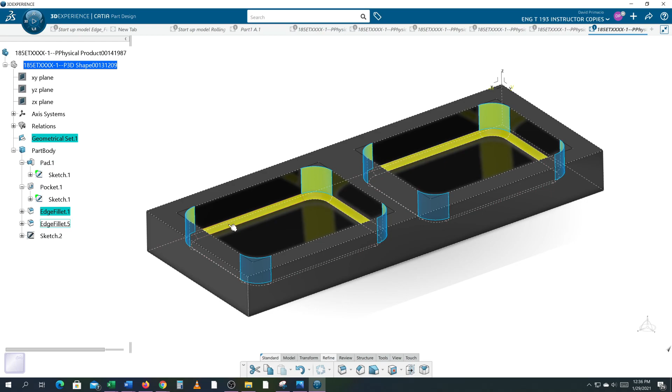Let's say I want to move this out of the pocket. So I'm going to go to my preferences and turn this off so it doesn't bump into the 2D or make it flat. And then I'm going to try and take this pocket.

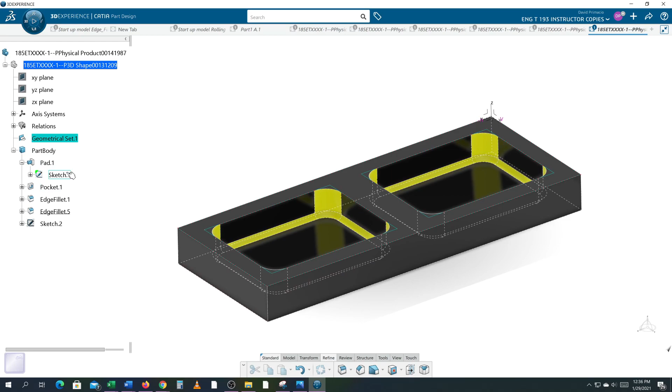Now I want to move this pocket over here. So I'm going to try this technique - go to Sketch, and I'm going to move this 2 inches, which should take that past, but it doesn't because I've got this constraint here telling it to always be a half inch, which is cool.

That's a good design. It's a good way to do that if I want to make sure I don't screw myself up. But I'm going to undo this - I was actually trying to get this profile.

Oh, you know what? Well I'll go ahead and do this. I'm going to delete this out and then take this and go 2 inches out. See how it goes past the part?

We'll do the constraint - it's fully constrained. We'll exit out, and it's not going to like this. It did not like that move - it's trying to go down past that part. So on V5, this wouldn't work either because of the way these fillets are.

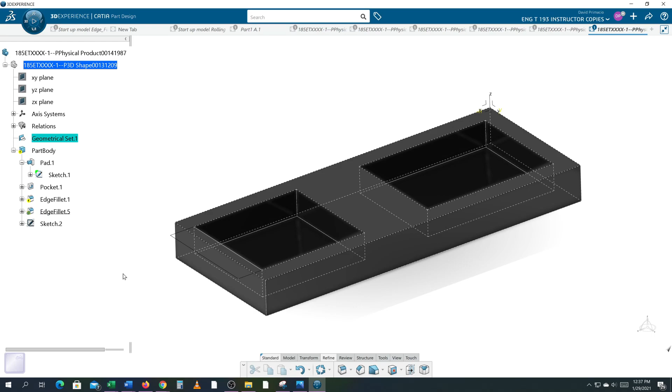And I told you this was a poor technique anyway. So let's undo what I've done, put it back, and we're going to just delete these fillets out.

Now, I know I've said to make all the same size fillets on the same branch, but you also got to look at this thing logically. I want to tie in all my fillets on this pocket to all be in one group, and same thing on the other. So the reality here is I actually would be better off if these were 2 separate pockets.

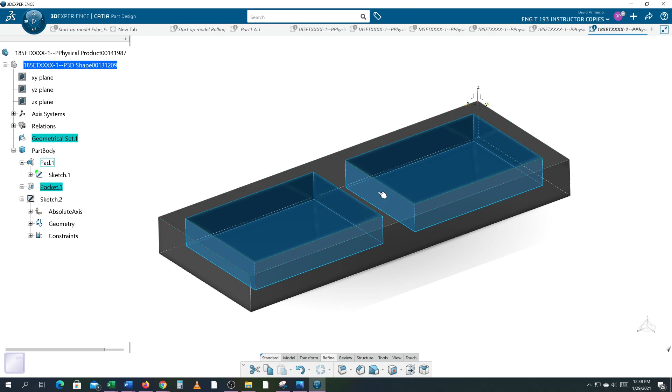Now let's take a look at this. I'm going to double click this pocket, and I'm going to hit go to profile. Because of the way I did this, I could easily delete that out. Say OK. Now that pocket doesn't exist anymore, right?

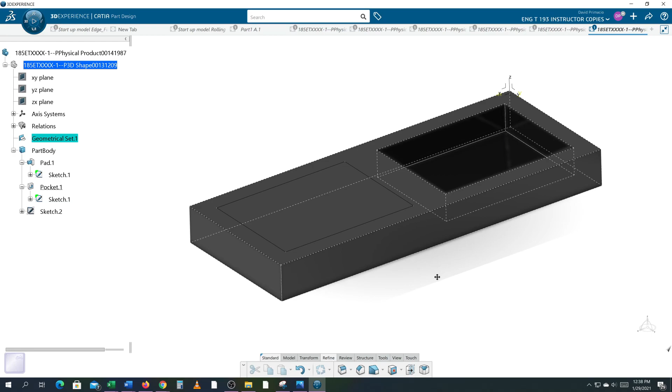So I have to have 2 separate pockets. I can do that now by going back to the pocket command, but I wanted to show you one little issue I find with pocketing.

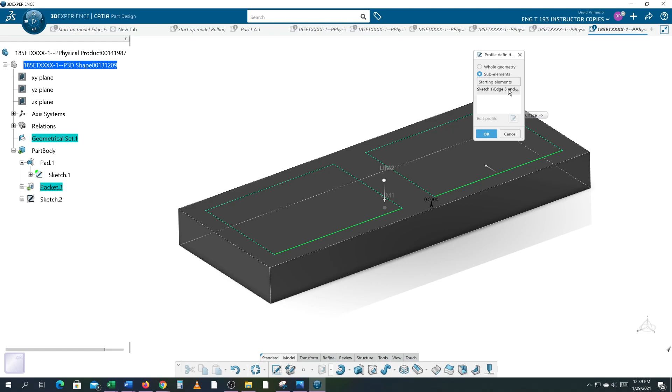Earlier, I think I showed you, if you go to Pocket, go to Profile Definition, you could grab this one and this one - you have your 2 sub-elements, but they're all in one thing. So when I select OK and I do my pocket a quarter inch off the bottom, that's all great.

But now I'm struggling to remove one of the pockets. So if I go back to Pocket here and I go to Profile Definition, all I can do is remove all of them, and then it won't even let me add this one back in here. I'll try and grab that edge back there, and it says right here sketch edge.

That's my sketch edge right there. If I click on it, it should grab it. It won't let me do it. I don't even know how to get past this.

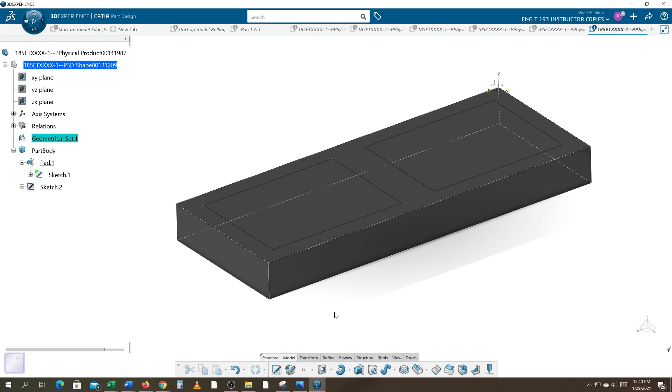So as far as I can tell, I'm stuck and I'm not able to remove this pocket out. So I'm just going to select OK, and the only thing I noticed is to delete that pocket, which would suck if there was anything tied to it right now, but all that would have to be redone.

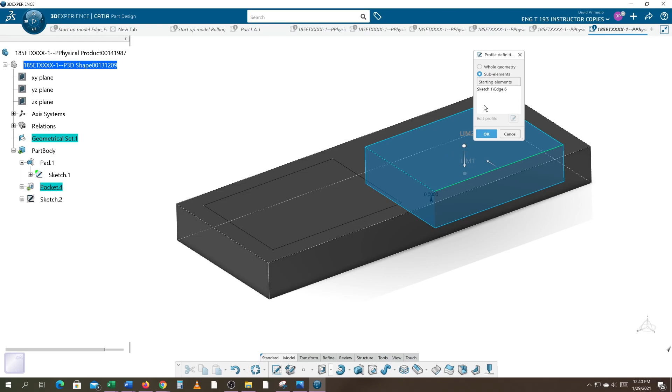So I'm going to go to Pocket, go to Profile Definition, select this one, select OK. If I go to profile definition again, I can select this one, and it will add a second one in there.

And that will allow me to have them individual, so if I want to do different things to them, I can. So we're going to go negative quarter inch off the bottom.

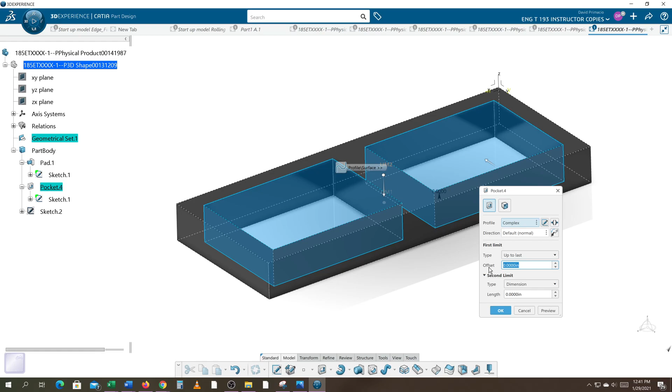Okay, now, let's see - I'm trying to remember what I was going to do here. I want to break this to 2 pockets. So I realized, oh man, I've got this in one.

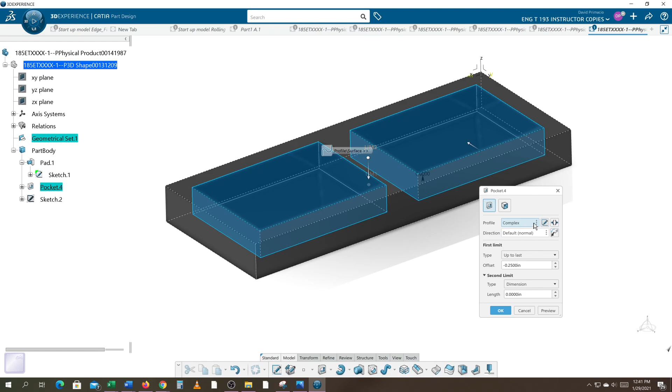It doesn't like it. So I'm going to go back to pocket, break it out, and hit that little X to remove it. So that pocket isn't there anymore.

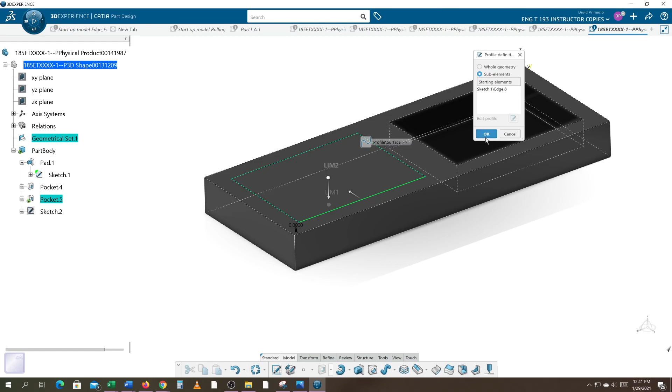So I'll go to the pocket command, go to profile and add another pocket, so I'll have 2 pockets in the tree. I'll go minus 0.25 again, so you can see in the tree, I'm still using just the one sketch and the 2 pockets. Now the problem is I'm going to go back to my sketch 1.

I don't want to do that right now. No.

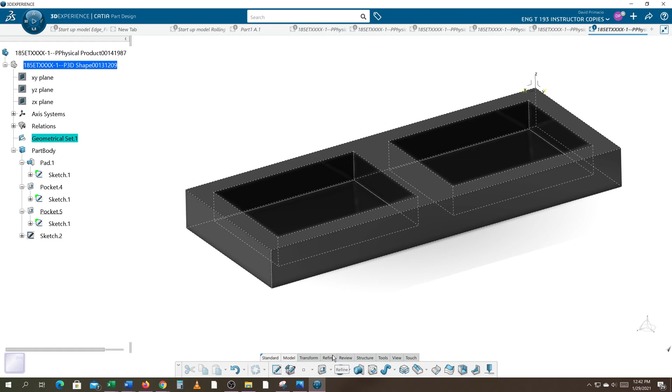The better technique for filleting this would be to go into refine, go to fillet, grab this edge, and make that a 1/2 inch radius for my end mill. And that one, and that one, and that one. Select OK.

Now, where is that fillet? That fillet is after pocket 5, but it should be after pocket 4. These fillets look like they're in pocket 5, but in reality, these fillets should be under pocket 4. So I can grab the pocket, drag it down, and let go.

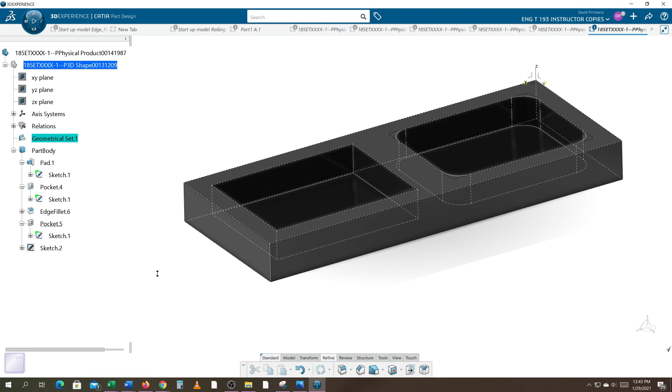Now, if I go to create another pocket or fillet, the ones on the bottom, it's going to try and put it under pocket 5. What you want to do is make your last fillet your in-work object. Now it pretends like pocket 5 doesn't even exist yet.

I go to fillet and grab the bottom surface and select OK. Whoops, I didn't want to do that size. No big deal, I'll just double click it and change that to 1/8 of an inch.

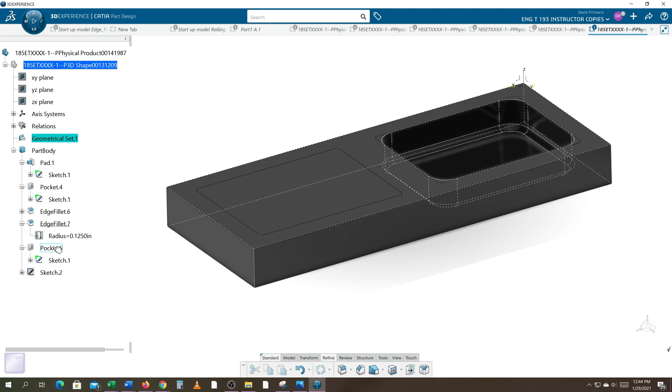So I'm going to go back to this pocket, make it the in-work object, and the pocket will appear. At which point I can go back to fillet.

I always do my largest radiuses first. So I'm going to do a 1/2 inch fillet and grab this edge, this edge, this edge, and this edge. Notice that I use the hidden line so I don't have to spin it around trying to grab the insides. Select OK. Grab the bottom surface and fillet that, add 1/8 of an inch.

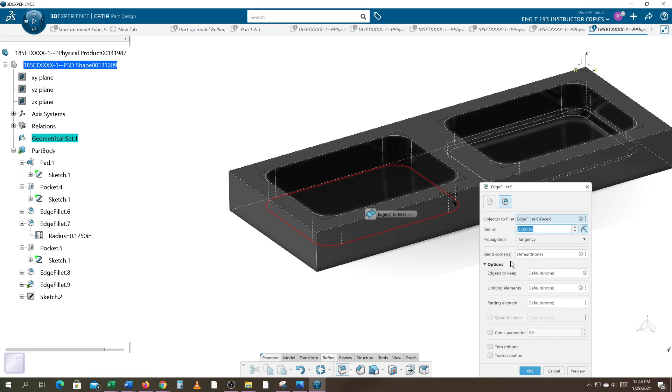All right, now this is a much better technique. You've got your... first off, let's color these. This is a group.

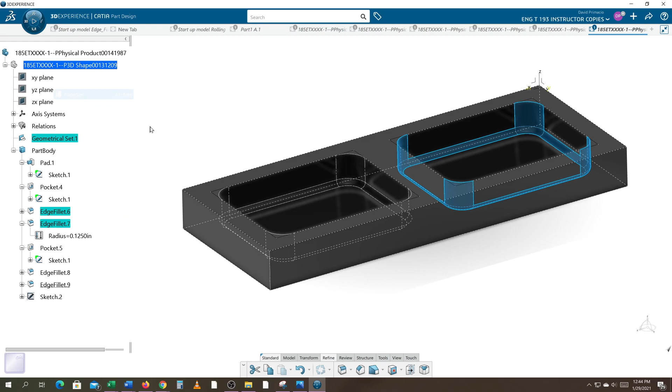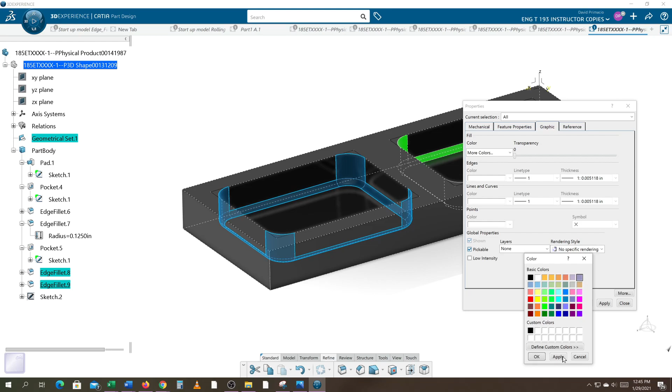And these two are a group. Oh, wait a minute. Where's silver at? There we go. I see gray on here. Oops. Okay, so we'll say that's gray. We'll make it my Seahawk color here.

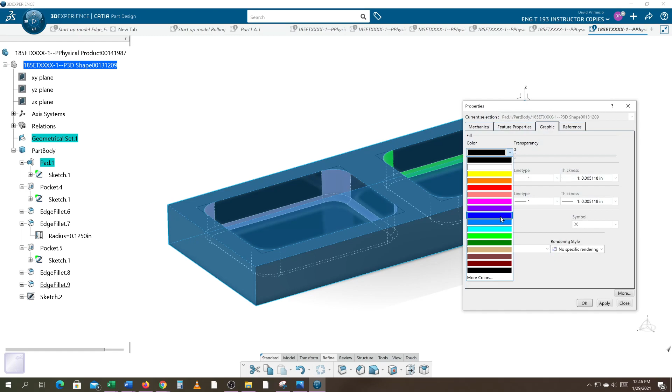All right. So this is a lot better technique because you can see in the tree. I will do a review and go to the first one. We started with the pad. We did the pocket. We filleted the pocket. And then we do the radius on that.

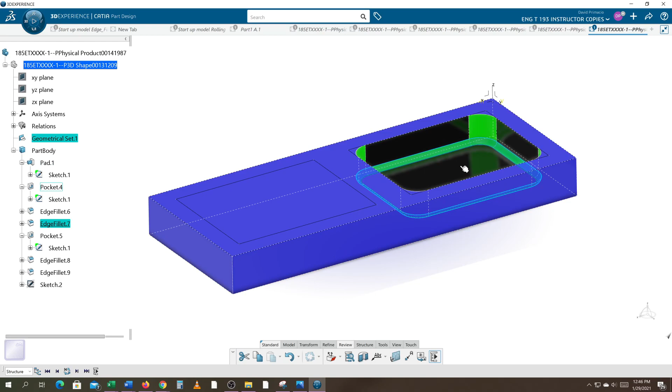By the way, if you machine this, this would happen. It wouldn't have a pocket and then add fillets anyway. So all this pocketing would happen in one time, and then the next set of pocketing would happen. And it allows me to move this as a group, where if I have them all underneath this, sometimes the system doesn't like that, and it gets confused when I try and move the pocket.

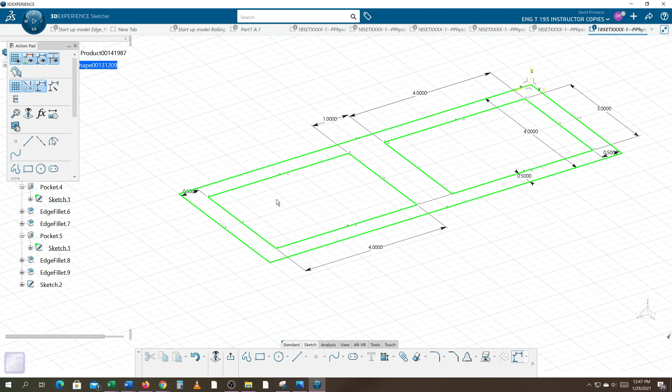I'm going to try and really confuse it and move it beyond the part. So I guess first I'll go into sketch 1, and I will make this grow 5 inches, and I'll move this 1.5 inches and exit out. See, it has no problem with that because I'm still within my boundary.

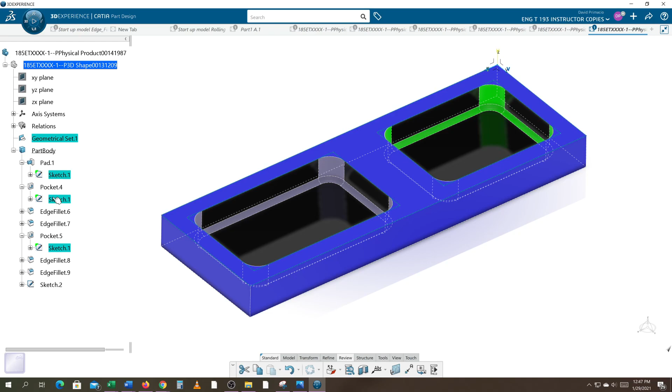So I can move this pocket around, but now I'm going to try and shove it off the part, which is a little trickier to even imagine doing. The thing is, you got to know to delete this constraint. Now I could change this to 7 inches. That pocket's going beyond that, and it should be okay to do this. Let's go ahead and add our constraint.

And it doesn't like it. And it says it doesn't like it. These edge face doesn't seem to be working out. That's the issue, and it stops here with this fillet. It doesn't like the fillet. So maybe if I just get rid of the fillets, it'll be fine.

And it is. Now here's a sucky part. In V5, this would be no problem. It just knows, like, okay, it's off the part. If you put it back on, it'll be filleted.

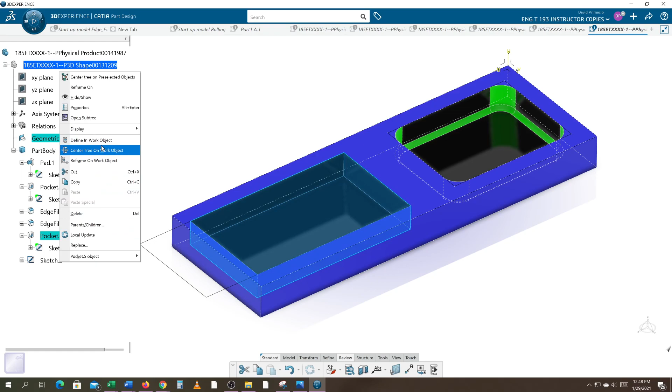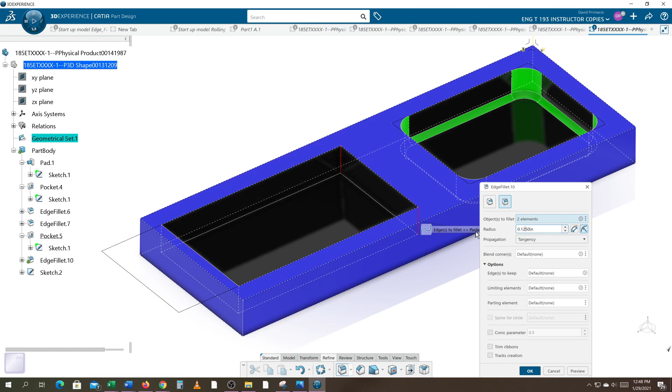Now what I have to do is, with the pocket as my define in work object, go and put my fillets back in. And this time I'm just doing this edge and this edge at 1/2 inch. I mistyped, at 1/2 inch. And then what's cool about this next part, when I grab this edge, it just knows to wrap all the way around all the tangent ones, and I go 1/8 inch.

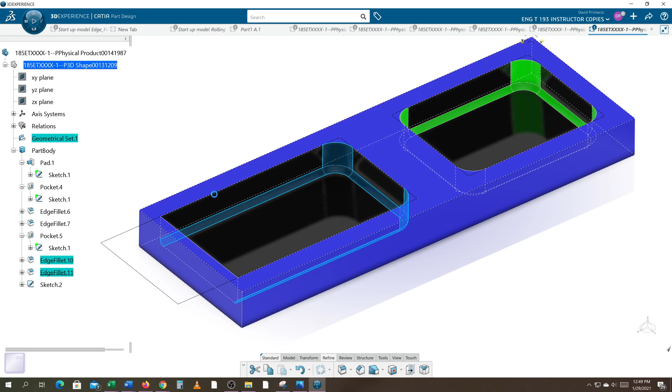Okay, and we can color those. So our fillets are green, but I've got this fillet and this fillet grouped under this pocket. This fillet, this fillet and this fillet. Okay, all under the pocket number 4.

And I managed to do this using just one sketch. I'll just hide my sketch here because it looks ugly. Alright, so there's your part. Oh no, look, it didn't cut all the way through.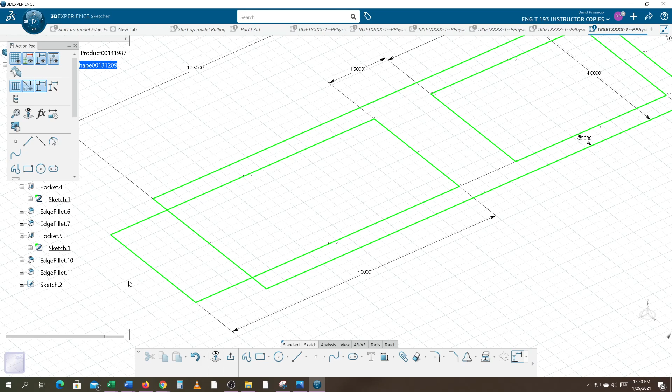It doesn't like it when I do a single sketch and cut all the way through the part. It looks like it would do it, but it somehow adds the material out there beyond that. So this technique does not work for that. So how the heck am I going to get around that? You're going to see on my next video.